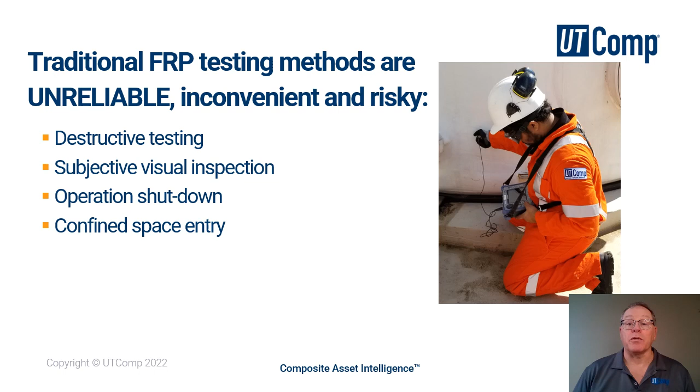This is such a problem that it has hampered the widespread adoption of FRP despite its unequaled durability and environmental benefits as an industrial material. Many assets are retired too soon. This is the problem that I set out to solve. I wanted to make testing FRP assets as simple and as reliable as testing steel assets.

Here, an example in this slide itself, this storage tank had been in service for 10 or 15 years. The owners were actually pretty concerned about the damage that the highly corrosive contents was inflicting on the inner surface of the tank. The other problem is that entering the tank, doing a confined space entry, was highly hazardous. We were able to inspect this from outside the tank while it was in operation.

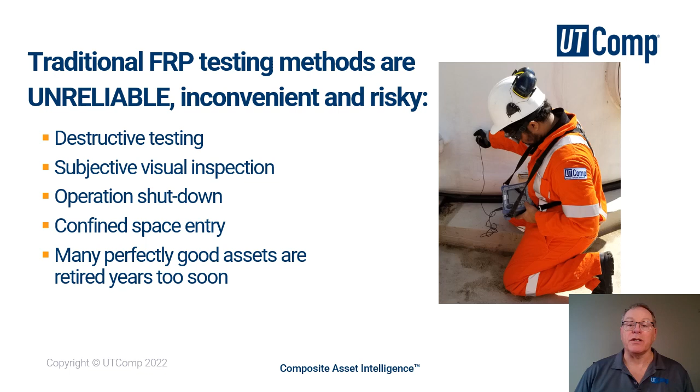If you could inspect this type of asset without shutting down and without risking human health and safety, would you do it? What if you had a way to detect flaws that can't be seen by the human eye while preserving the structural integrity? What if you knew that this tank did not have to be replaced, that it is good for many more years? How much time and money would you save?

The UltraAnalytix system has many benefits. It's non-destructive. There's no need to sacrifice assets for inspection, and the structural integrity of the asset is preserved. It's non-intrusive. Inspectors do not require access to the inside of the equipment, thereby minimizing confined space entry. You can inspect the equipment while it's in operation.

There's no need for production downtime, and you get detailed service life forecasting reports so you can make the best asset management decisions based on hard data. UTComp's inspectors and engineers are certified under ASNT SNT-TC-1A, which is actually required by some regulators.

Here's how it works. The UltraAnalytix system combines ultrasonic data collected in the field along with a systematic external assessment. And the field data is then transmitted to UTComp so that our engineers can evaluate the data and process it through our proprietary validated algorithm.

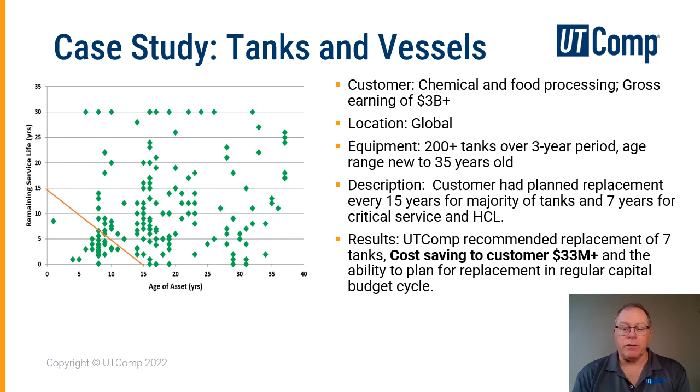Another case. This is piping in a phosphate plant near Aqaba, Jordan. More than 10 kilometers or 6 miles of piping was inspected of various sizes from say 50 millimeters diameter up to, I think, 400 millimeters diameter. The customer needed to know if the piping could be restarted safely.

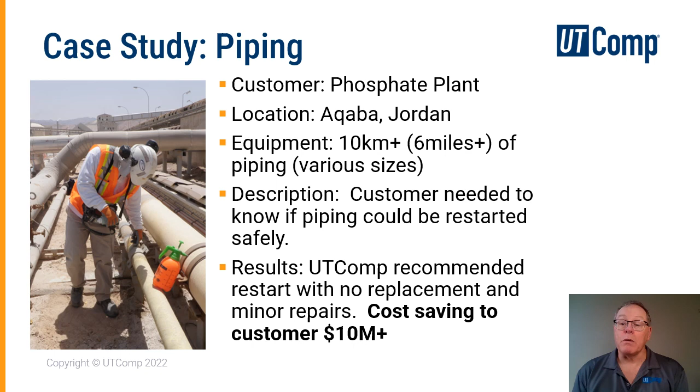In fact, suppliers of piping equipment just said, why don't you just replace the pipe, which would have cost more than $10 million. For a fraction of that cost, significantly less than 10%, actually probably about 2% of that cost, we did a full evaluation and recommended restart with no replacement and only some minor repairs.

Another example is a scrubber in a chemical recovery process in a large facility, a titanium dioxide facility in Canada. This scrubber is 23 years old. It's used in emissions control. The customer actually wanted to have ongoing reliability. At 10 years old, the equipment manufacturer actually said we should replace this.

We looked at it, we assessed it, and since 2011, we've been able to cement in that it's got a projected service life of more than 20 years and minimal repair, no replacement. The cost savings of this particular set of actions was at least $3 million. What was the cost? What's the return on investment for that? We're looking at somewhere on the order of only a few percent of the replacement cost to be able to give that certainty to the customer.

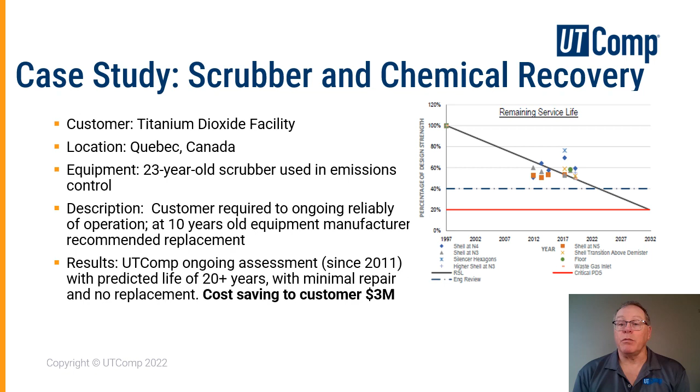This is an example where a composite material was placed around a steel pipe that was too thin for continued safe operation. It had been corroded from the inside for an oil and gas customer. This customer itself has a global operation, and they use this type of composite overwrap in order to strengthen steel assets that may need some additional strengthening or reinforcement for at least a short-term operation before they can be replaced.

Well, they wanted to know if this overwrap was capable of continuing in operation. So we did a survey, and in fact, what we're showing on the chart is color code based on the detected thickness of the material. What we did find is that there was virtually no polymer damage at this point. The reason there was no polymer damage is because the polymer hadn't been exposed to any kind of a stretch or strain from stress. So as long as it hadn't been exposed to any of it, we weren't concerned at all. We actually recommended that they continue the use of this.

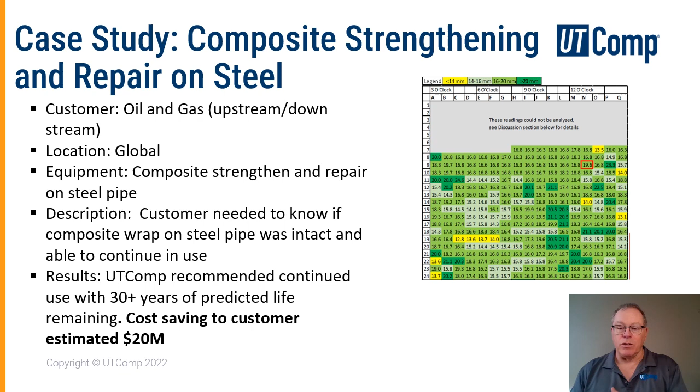Applications for new equipment or before you buy processes and process plants. You could use this process before purchasing a new plant to get a survey of the FRP in the plant to know the condition of the equipment. You could actually use UltraAnalytix to provide you with acceptance criteria for replacement equipment.

You should also know when to service your equipment. So we track equipment as it ages. We use it to identify repair and replacement needs. We can baseline any repairs, and therefore we know where we're starting from. And as you repair on top of existing composite material, it actually becomes a little more complicated to solve. So it's useful to baseline that. And we can use it as a plan or part of the plan for capital replacements.

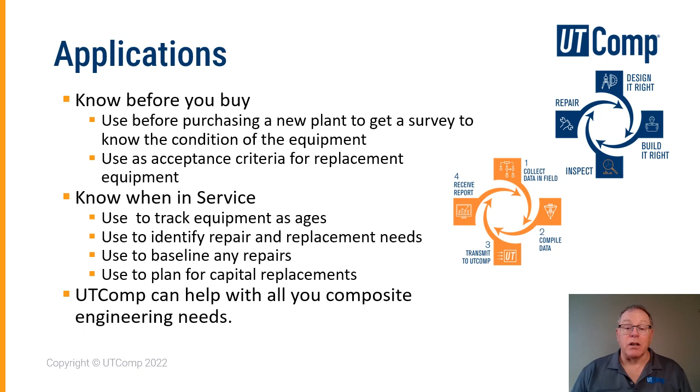UTComp can help you with all of your composite engineering needs. And where do we work? The industries that we serve range across the entire spectrum. Chemical treatment, mining and mineral processing, pulp and paper, water and wastewater, oil and gas, wind turbines. We've actually done some work in some structural elements for process plants that are highly corrosive.

There have been more than 7,000 asset inspections completed to date. Work has been done on all continents except Antarctica. At least 193 customers have been served, and there are people trained around the world to be able to do this inspection and complete the required work in the field.